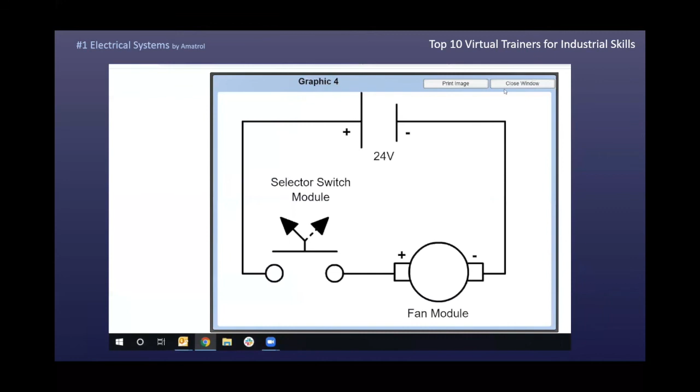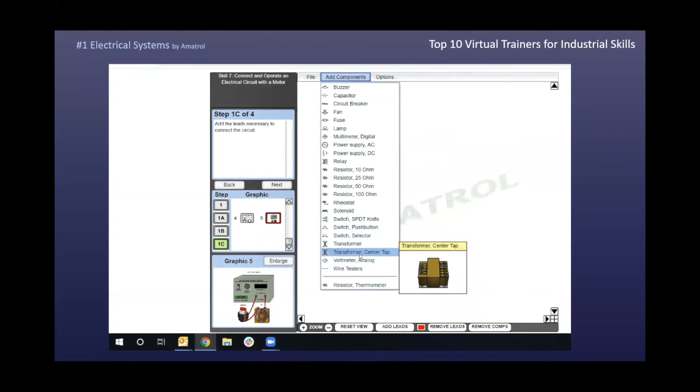I love this simulator. We can look at schematics, we can look at diagrams, we can look at a wide variety of components, from circuit breakers and fuses, power supplies, resistors, switches, transformers, and wire testers. So let's try this. Let's put a DC power supply on the screen, and let's add a lamp and a switch.

And then let's add our leads from the power supply to the switch, from the switch to the lamp, and from the lamp back to the power supply. Adjust our voltage, turn on our power, and hit the switch, and the lamp comes on. Simple enough, but let's try a couple other experiments. Turn off the power supply and remove that lead.

What happens if a student connects the lead to the wrong terminal and turns the power on and hits the switch? Oh, we blew a circuit breaker, and now they can understand exactly what it was that created the problem. Let's try something a little bit different. We'll remove that lead. And now let's reconnect our circuit.

And what student isn't going to crank the voltage all the way up to see what happens? Hit the push button switch and the lamp breaks. We can easily see exactly what took place. Student learns their lesson. They replace the bulb.

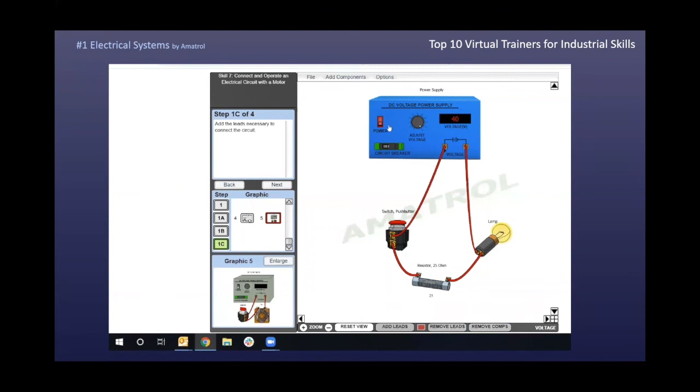So what happens if we do exactly the same thing, but we add a resistor? 25 ohm resistor, add our leads. Voltage is still all the way up. We turn on our power supply. And sure enough, we don't break the lamp. That is what virtual learning looks like.

We can even add onto this a virtual multimeter and measure the circuit. So here we are turning on our power, connecting our leads. Believe it or not, we can overload the multimeter, adjust it, and now we can see that it's reading 19.85 volts.

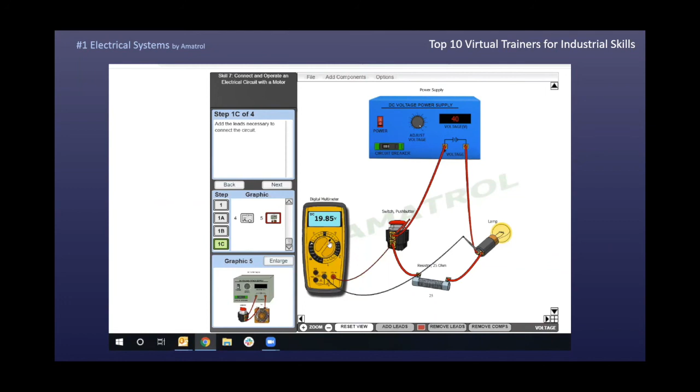That is the Electrical Systems Simulator by Amatrol, and it is number one on our list of top 10 virtual trainers for industrial skills. Let's move on to number two, Automation Studio. This is the most powerful simulation software for industrial programs on the market. It combines electrofluid power, electrical technology, and controls technology into one multi-technology circuit design and simulation platform.

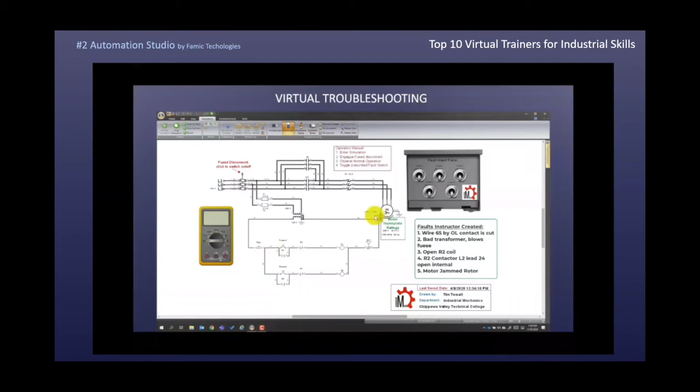Instructors can even clone the equipment that sits in their labs today, not choose someone else's equipment, but provide a perfect digital simulation of what is in their labs now. We can enable our students to build a circuit, either one that we design for them or one that they design on their own. They can activate that circuit and see it come to life, actually see flow circulating through it.

Instructors insert or create links to their own documents or directly to outside websites, videos, and information that can support or explain the system right from the software itself. And they can create voiceover audio files that could shepherd a student through a circuit, explaining it along the way, addressing our auditory learners, our visual learners, and our kinesthetic learners all at once.

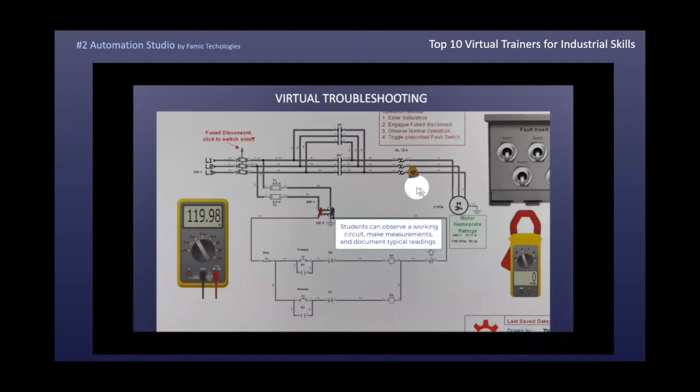For those of you that joined us 2 weeks ago, we saw Tim Tewalt, who's the program director at Chippewa Valley Technical College, demonstrate how he is using this powerful software in his program. On to number three. Number three on our top 10 virtual trainers is the Hydraulic Systems Trainer from Amatrol.

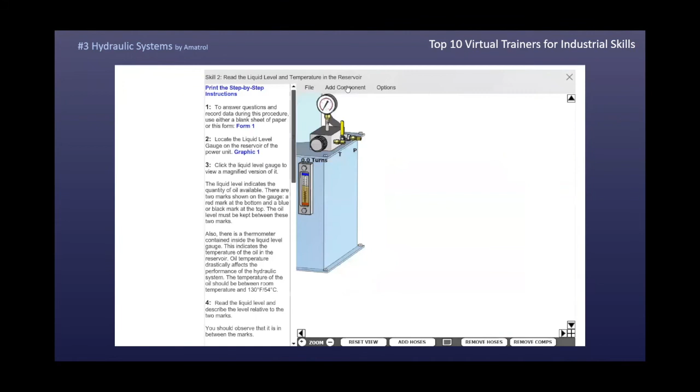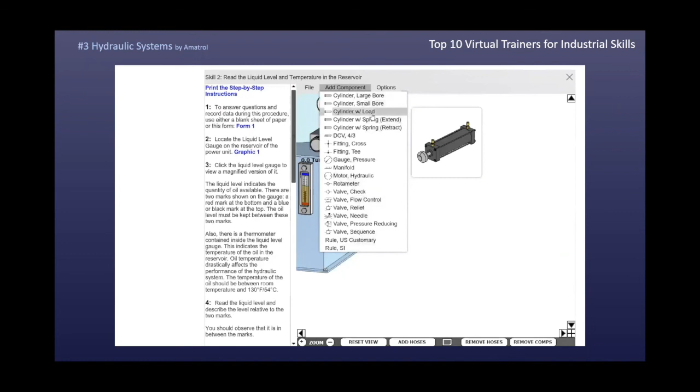This works much like the electrical trainer we looked at just a moment ago, but with hydraulic components, and a wide variety of them too. Small and large bore cylinders, cylinders with loads and extended and retracted springs, a directional control valve, cross and T-fittings, gauges, manifolds, motors, and a wide variety of valve types. Here we see the user connect a directional control valve to a hydraulic cylinder.

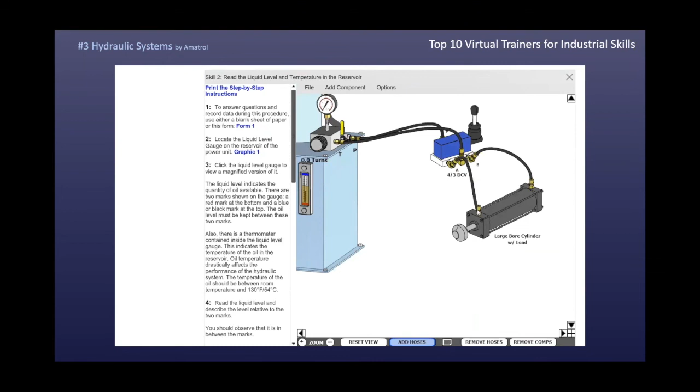This is an open sandbox. Unlike many simulators that only let a student set up the circuit one way, on this one they can actually set it up wrong. As we all know, students often learn as much from doing something wrong and figuring out their mistake as they do from being coached through the perfect solution. That is the importance of an open sandbox. By the way, we chose to share the Amatrol hydraulic simulator, but this company offers a great pneumatics trainer as well.

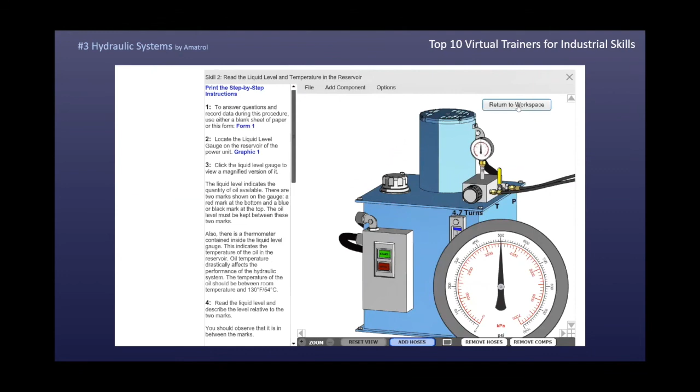Number 4, Interactive Labs by Quanser. This one applies a little bit more to advanced control courses at a university level engineering program, maybe an advanced technical or community college program, and it is so cool that we had to include it on our list.

Quanser's Interactive Labs runs on a desktop or on a smart device. For those of you that are familiar with Quanser's QUBE-Servo 2 or their Aero, this simulator emulates the performance of both of these products. You can literally fly around with your mouse and see the training unit in 3D space.

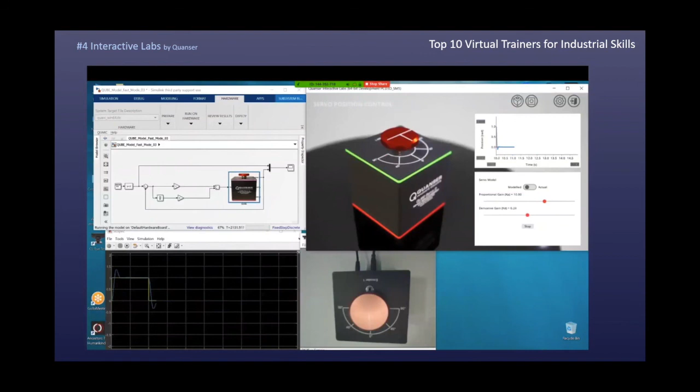The QUBE-Servo version is a great tool for enabling students to experiment with DC motor modeling, proportional position and derivative control, speed and lead control, stability analysis, steady state error, and with the inverted pendulum, we add moment of inertia, pendulum modeling, crane control, and balance control.

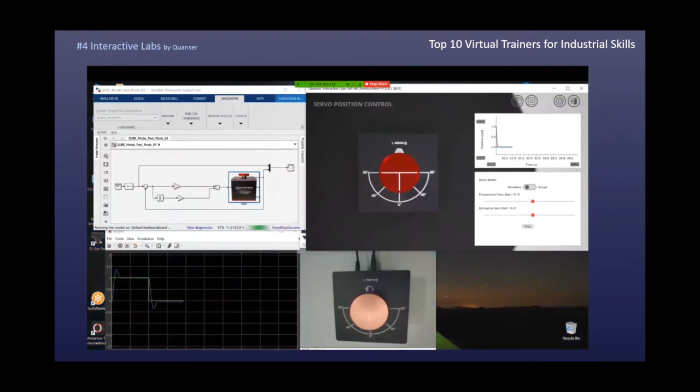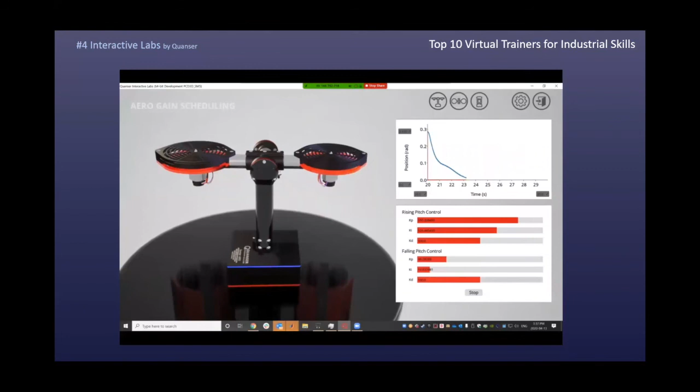Now on to Amatrol's Electric Relay Control Virtual Trainer. This is one of my absolute favorites. I am a hands-on kinesthetic learner, very tactile. I could sit in a classroom and listen to a lecture and literally nothing would stick. Not every student is like that, but that's how I was. Sit through a lecture about control circuits? No way. But learn by doing, AND, OR, NOT, NOR, NAND, memory, normally closed, normally open. If I could do it, then it would stick.

This virtual trainer drives home relay logic and control circuits like no other. Push buttons, selector switches, solenoids, motors, cylinders, ladder diagrams, symbols, control logic relays, directional control valves. It's all there. Here we can see an AND circuit, so that individual has to press both of those buttons in order for that circuit to work. Let's turn it off and remove some of those leads. In fact, let's remove all of the leads.

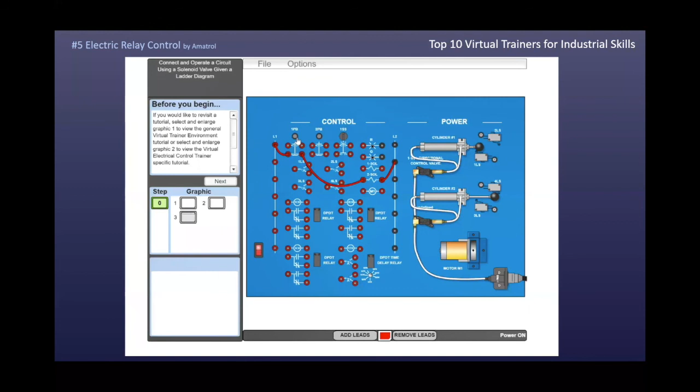And here we will set up a lead that goes from L1 to a normally closed contact to a solenoid that controls the cylinder. And let's see what happens when we turn on our trainer and hit the push button. The cylinder retracts because it's a normally closed contact. We can do all of the same things that we could do on a physical electric relay control trainer using this virtual version from Amatrol.

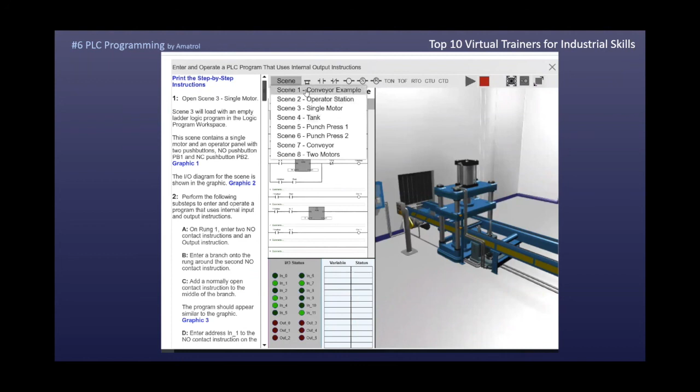And that is a perfect segue and the perfect precursor to number 6. Once a learner has been taught the basics of control logic, ladder logic, PLC programming, automation, fabrication, conveyors, motors, and so on, this simulator ties it all together. Step-by-step instructions, graphics, pictures, schematics, and logic elements. It is a perfect opportunity for a student to perform everything they learned in a PLC or controls course.

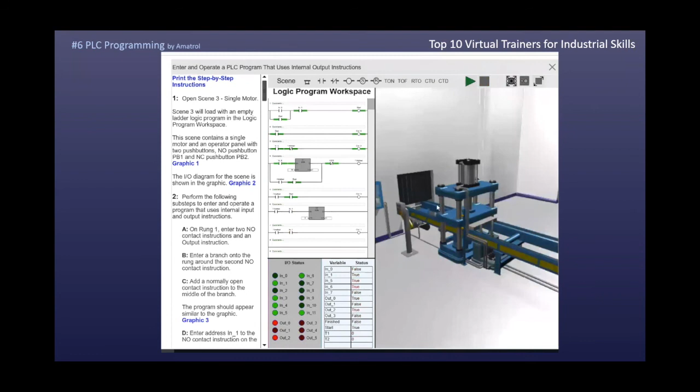Essentially, the student begins with a built-in PLC program that runs a conveyor. From there, the simulator offers 8 successive scenes, an operator station, a conveyor, a tank, 2 punch presses, 2 motors. By the end of the content, the student is building their own PLC program to run the entire line. They add all of their own ladder logic elements and build their own program. I think of all the capstone projects that I see in technical community colleges and engineering programs. And this is in a way a virtual version of that capstone project.

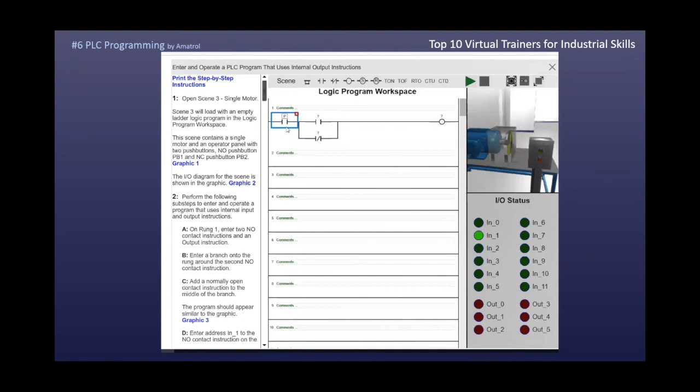Moving along to number 7 on our list of top 10 virtual trainers for industrial skills. This is the LJ Create Hybrid Vehicle Simulator. It starts out easy enough. We grab our key fob and we unlock the vehicle. We start it and place it into drive. Now we depress our accelerator and the vehicle begins to move.

Down here in the lower right-hand corner, we can look at the battery charge. We can also take a look at energy regenerated, the amount of energy we're regenerating. We can look at our fuel economy. We can review our CO2. So let's set that on energy regeneration and head over to the left side. We can look at our component view and see all of the components in the hybrid vehicle. What if we wanted to look at a cutaway? We would click right here, and that shows us the cutaway.

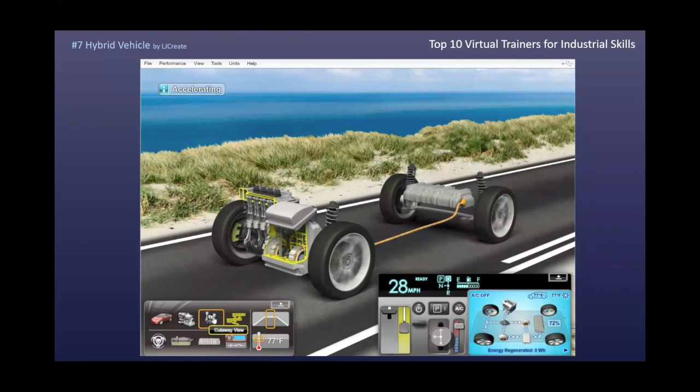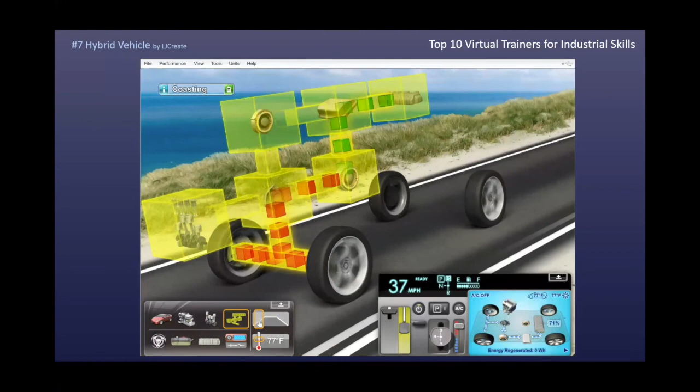I love this power flow simulation. So now we can see the power flow from the internal combustion engine to the battery and so on. What if I set this vehicle on a decline and have it go downhill? Now we're using less power, and we can see that the internal combustion engine shuts off, and we are now driving power to the battery as we head downhill.

Looking over here again on the left, we can look at our planetary gears, fully interactive. We can click on our fuel tank and see that. We can look at the battery.

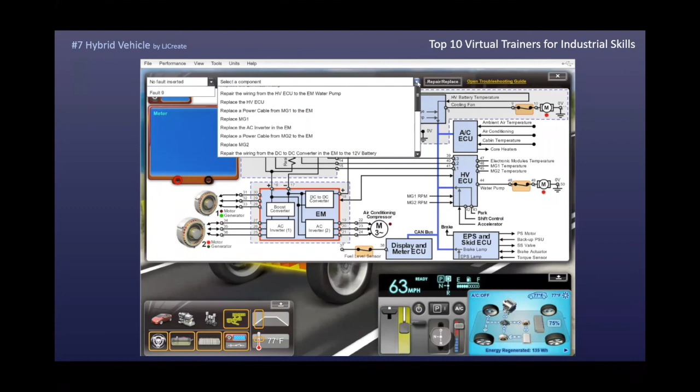And perhaps the most unique thing is the way that we can teach troubleshooting. So we click over here on this next box, and it takes us over to a complete troubleshooting schematic. And now on the left-hand side, we can select a fault. The student doesn't know what that fault is. We select a fault, and then when the vehicle stops working properly, they have to figure out which component is the reason for the failure.

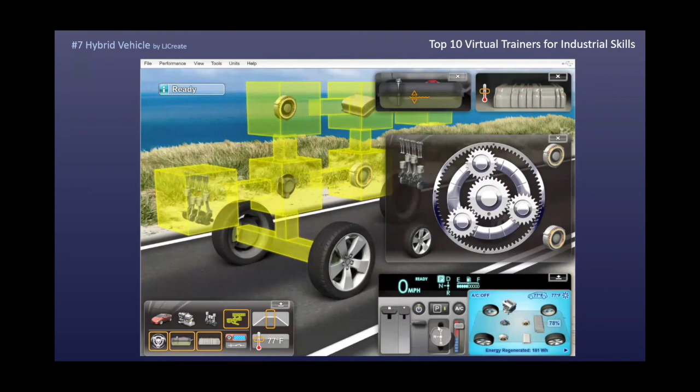So that is the LJ Create Hybrid Vehicle Center Simulator, number 7 on our list. We'll decelerate and depress our brake. Put the vehicle in park so that we can move on to our next, which is number 8. And number 8 is NC Guide by FANUC. Let's turn our discussion to CNC. One of our favorites here is the FANUC NC Guide.

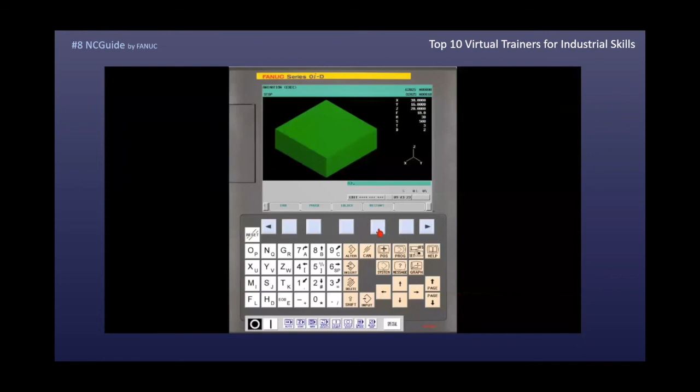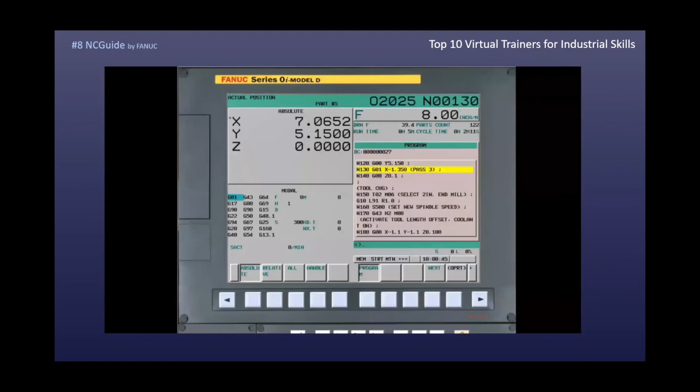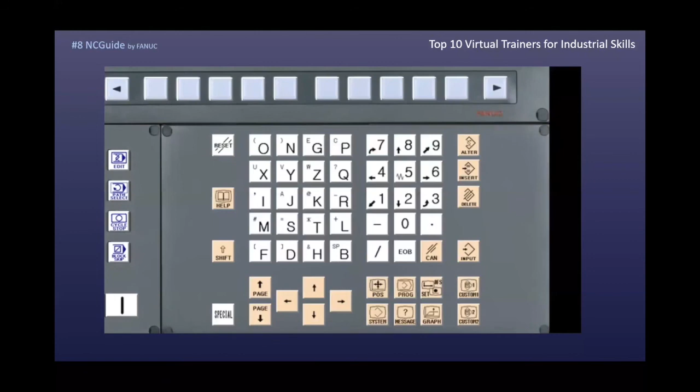As we all know, FANUC owns the lion's share of the CNC control market in the United States. Essentially, this is FANUC's CNC software running on a personal computer. It's a great tool for demonstration of CNC programming and operation. If an instructor is teaching a distance CNC course, we can use this for demonstrating CNC. This is authentic FANUC CNC software. It's the real thing. If students are operating it from a device with a touchscreen, they can even press real buttons. It can run on a school PC, or a student can use it at home.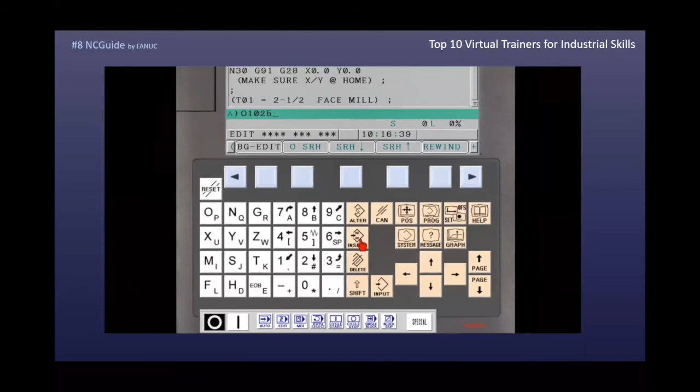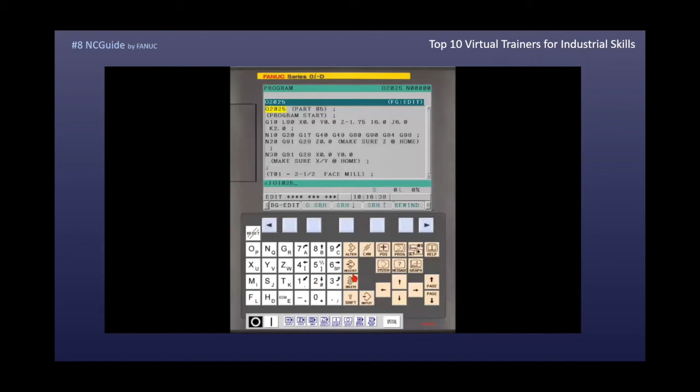NC Guide supports both milling and turning in both the most popular and the most advanced FANUC CNC controls. We can use it using a QWERTY keyboard or an OEM MDI. It even enables the students to load programs from an external source, update tool and workpiece offsets and setups, and update tool wear offsets as well. We have several technical and community college programs already using NC Guide in their CNC programs, and the feedback has been outstanding. It's a great tool to help a student hit the lab both confident and proficient.

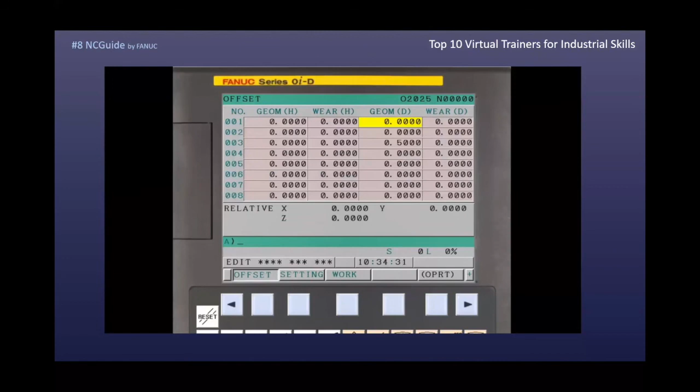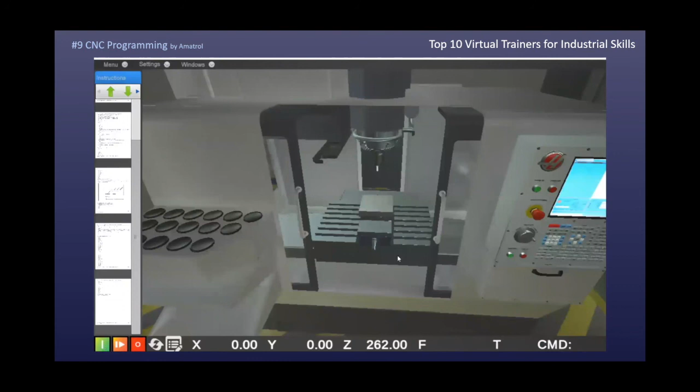And from there, we move on to number 9, which is Amatrol's CNC simulation. When it comes to applied CNC simulators, this one from Amatrol is one of my favorites. The skills are spelled out on the written instructions, or the student can go off on their own. They learn to set up a part, convert it from inches to millimeters. They can use code that's already loaded or program their own G code and M code. Once they are done programming, they hit the Start Program button and their program will run.

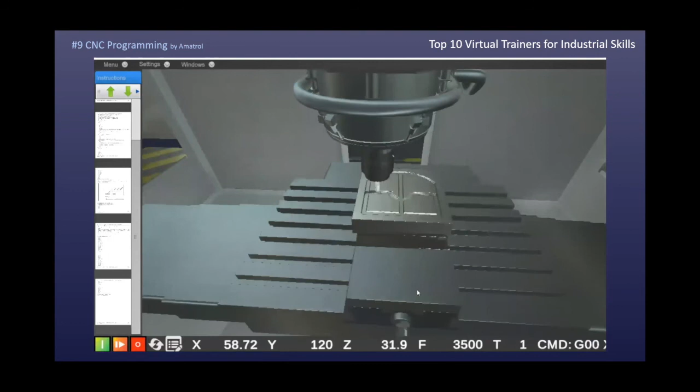As the part is machined, the applicable line of code is highlighted, so students of all levels can see exactly how the code is manifesting itself on the part, and vice versa. We can make changes to the code with the editor. If we program the tool to go out of the toolpath, the simulator will do exactly the same thing. It is the next best thing to being in the lab.

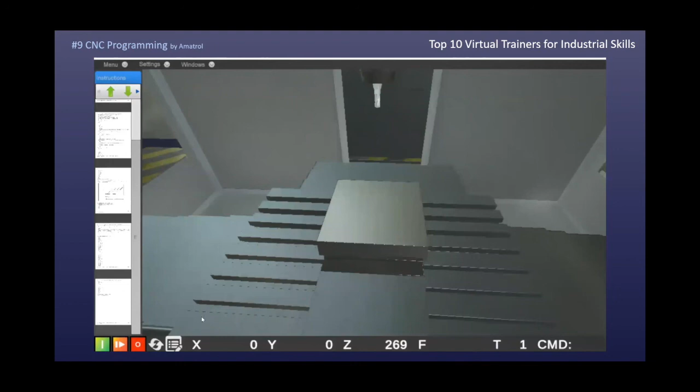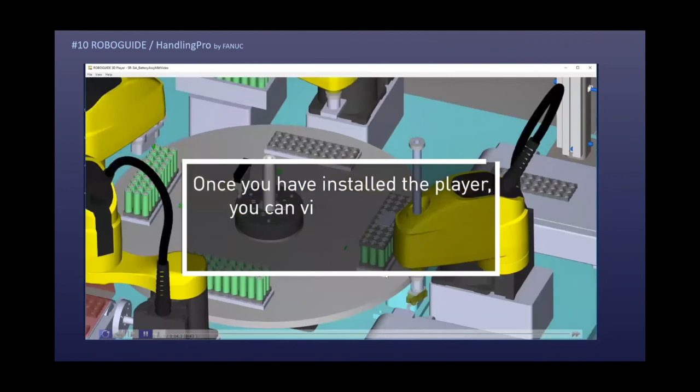And finally, number 10. Let's jump into FANUC's RoboGuide. Hundreds of educators all across the Midwest are already using RoboGuide to teach robotics technology to their students. We can use this software to teach all of the same competencies we teach on authentic FANUC robots: robot safety, programming, operation, jogging, frames, macros, and so on. Part of the beauty is the power of the software.

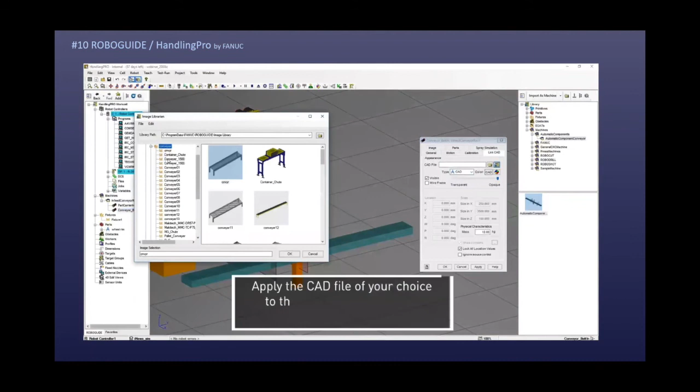From simple LR Mate programs we might see a high school student run to complex robotic work cells and everything in between. A student can take their program directly from RoboGuide to a physical robot and run the program, and we even have advanced programs tying this software to their data analytics curriculum. We see plenty of labs that integrate a teach pendant as well directly to the RoboGuide software for a unique hybrid between hands-on and simulation.

So there you have it, our 10 favorite world-class virtual simulators. But that was just the tip of the iceberg. There are dozens upon dozens of these. In fact, the most common comment we hear on this topic is when people say, I had no idea that all of this was out there. But it is. And we have simulators for alternative energy and drone technology and motor control troubleshooting, measurement, mechanical drives and mechanical systems, energy consumption, industrial throughput optimization, production assembly, power tools, and the list goes on.

As we look to fall, as we think about new ways to flip our classrooms, to optimize student health and safety, and to embrace a new way of learning, keep skills simulation at the forefront. We hope this overview is helpful. We hope it has sparked some enthusiasm for virtual training.